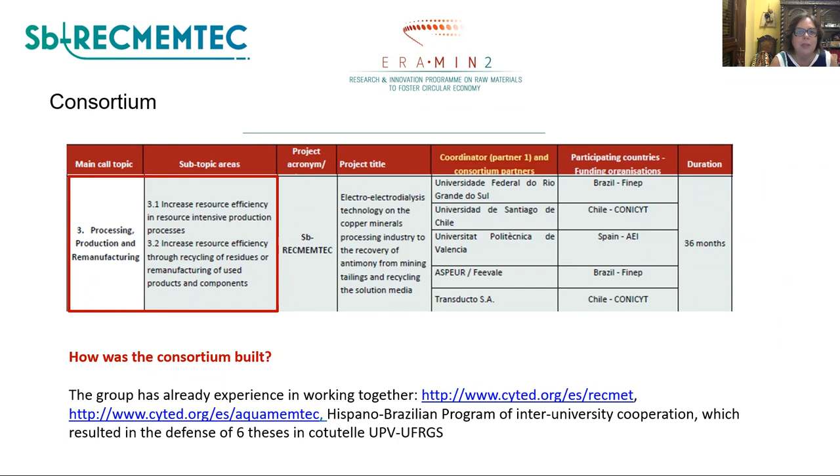So the project is supported by ERAMIN and the funding agencies of each country. And as a function of the different national funding organizations' internal processes, the groups have different project start and end dates and different times and roles.

So especially for Brazil, we began the project in the middle of the lockdown and the pandemic situation. It was a challenge, but we think that we were able to manage it because we always share clear information and objectives between the enterprise and the universities. We have done different online meetings and we are always in touch by WhatsApp and so on.

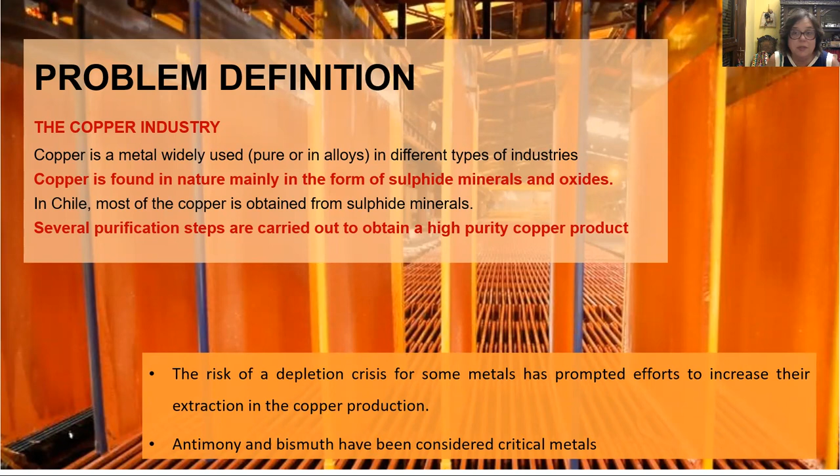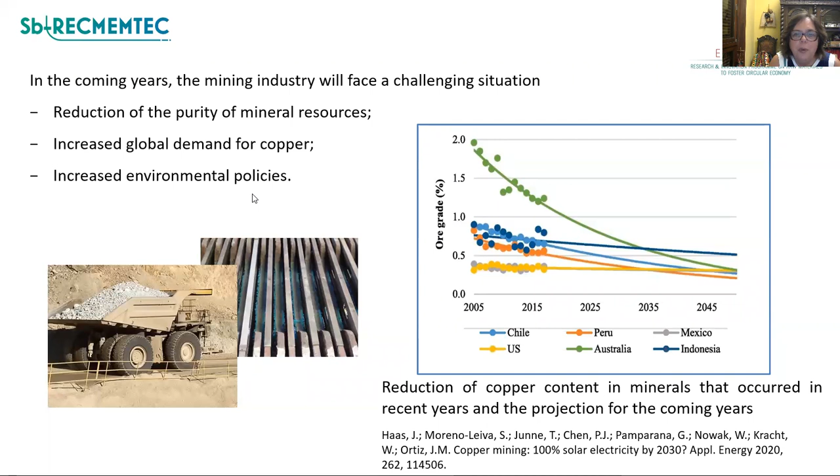In the coming years, the mining industry will face a more challenging situation than today, because of the reduction of the purity of mineral resources, the increased global demand for copper, and increased environmental policies. So it's important to think about the wastes that are being generated and about extracting other metals from the same mineral.

Talking about the state of the art, copper sulfide minerals are processed by pyrometallurgical processes. So there is a mineral processing step, a mineral concentration step, a concentrate casting, and at the end an electro-refining to obtain a copper cathode with 99.99% of purity. This electro-refining is carried out in an electrolysis cell, and sulfuric acid is used as electrolyte.

This sulfuric acid must be purified to be reused. One of the impurities that are removed during this purification step by ion exchange is antimony. And during the ion exchange regeneration with hydrochloric acid, a solution containing antimony, or a wastewater, is generated.

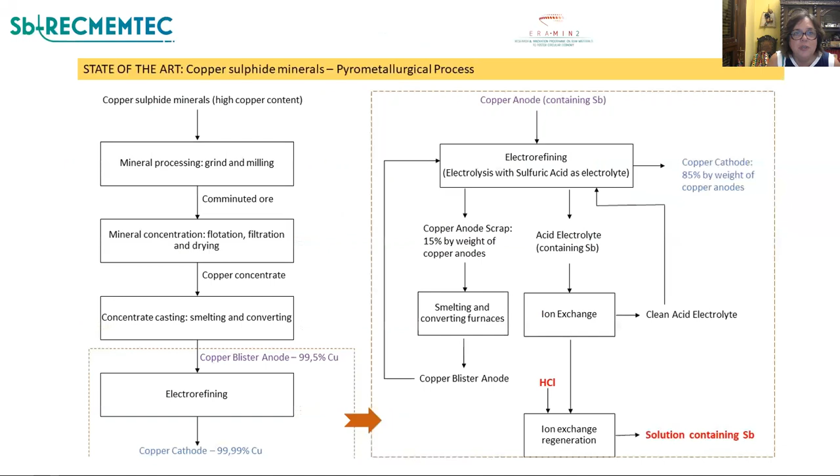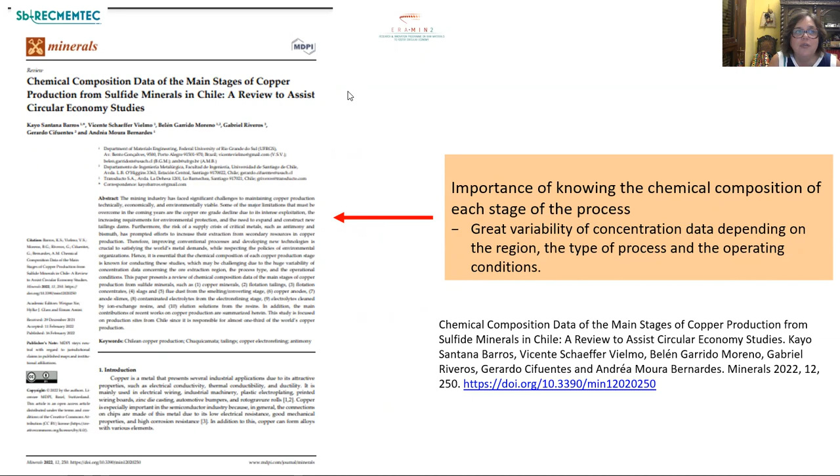Then, one thing that is important is to understand in each of these steps where we can find other metals or antimony to be recovered. So we have done a study about the chemical composition of the main stages of copper production, and the results show that there is antimony in many of the wastes that are generated during the process. But the highest antimony content is in this solution of the ion exchange regeneration.

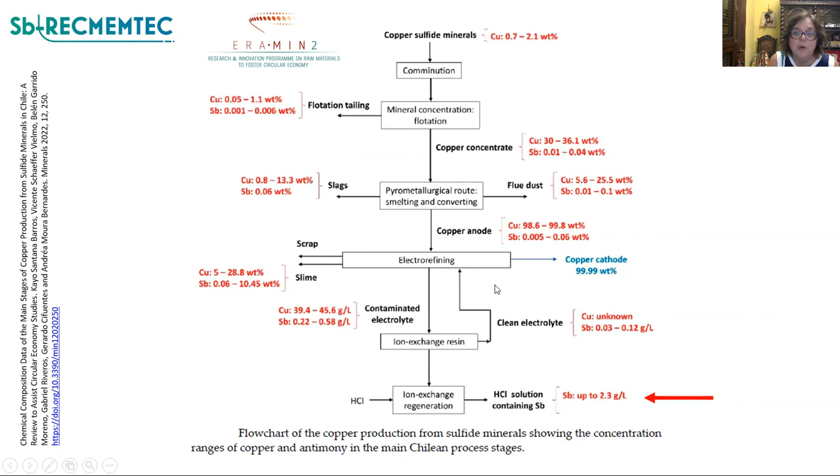So in this project we are studying mainly this solution, but other projects can then be organized to study the recovery of antimony from other wastes.

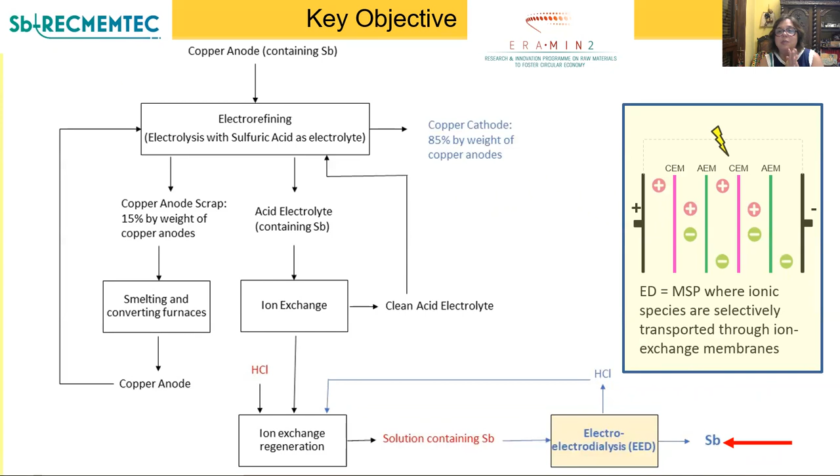So the key objective is the recovery of antimony by electro-electrodialysis. Electrodialysis is a membrane separation process where ionic species are selectively transported through ion exchange membranes. So when we talk about electro-electrodialysis, we are using the same principle, but in this process we are going to recover antimony not only in a concentrated solution, but mainly as a deposit on the cathodes, meaning it is a process used for antimony electrowinning.

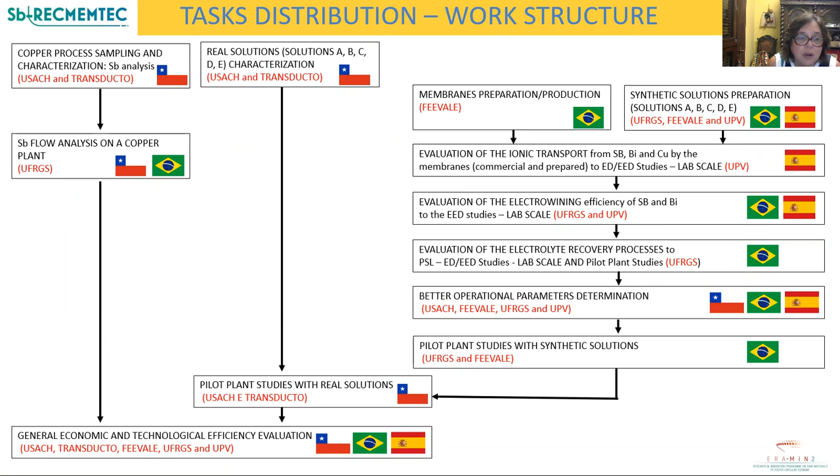About our work structure, we have distributed tasks among the different groups and countries to achieve the main result. That's going to be the definition of operation parameters and a technological and economic efficiency evaluation.

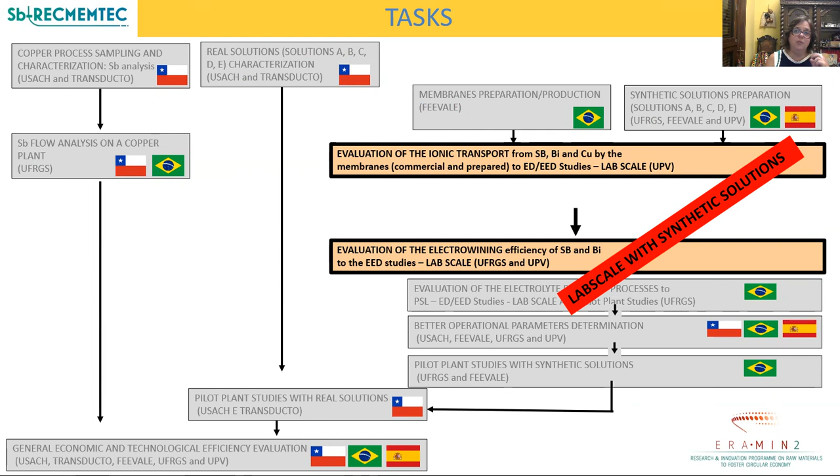I'm going to talk now a little bit about the experiments and results that were done in lab scale with synthetic solutions. These solutions were produced in the laboratory as a surrogate, in terms of hydrochloric acid and antimony, of this wastewater that is generated in the ion exchange regeneration in industry. So Brazil and Spain have worked with this produced solution, and the idea is to recover antimony.

We have to consider that when we have a solution containing hydrochloric acid and antimony, there is the possibility of different chemical reactions forming from anions to cations of antimony. And that is an important parameter when we think about ion exchange membranes. And there is also the possibility of different electrochemical reactions.

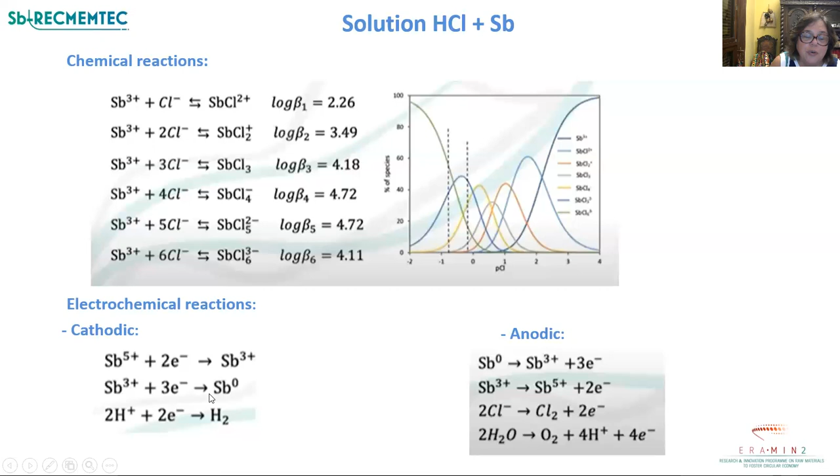The one that is more important for us is this cathodic reaction, where we obtain the antimony as a metal deposit on the cathode. But we should consider that in the anodic part of the cell, there will be the possibility of reoxidation of this produced antimony. So the idea of using a membrane is to separate cathodic and anodic reactions and then to have this reaction occurring and recovering antimony.

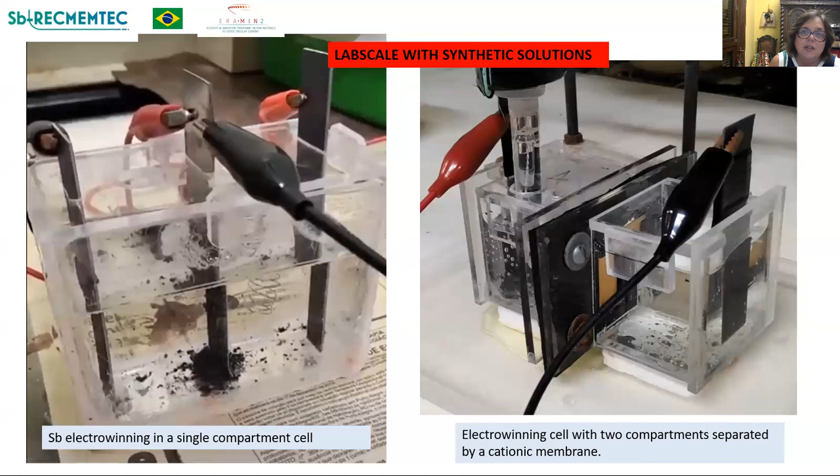So in Brazil we started working with lab scale experiments, and we have done the antimony electrowinning in a single compartment cell, and also electrowinning with two compartments, and the compartments were separated by a cationic membrane. The idea then was to avoid the reoxidation of antimony.

We have obtained different qualities of antimony deposit, but it was possible to recover antimony from the solution. We are also studying the electrodialysis process in order to recover the acid to be reused in the ion exchange regeneration.

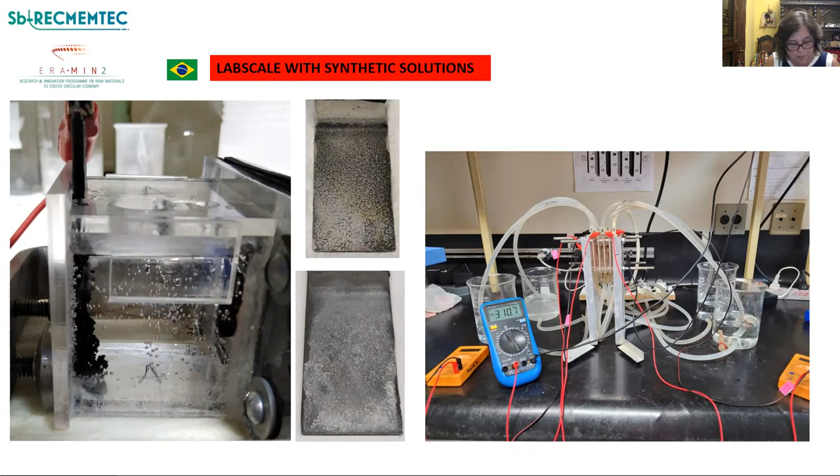When more negative potentials are used, then there is hydrogen production, and this generates a less adherent deposit. So the hydrogen generation generates a deposit that doesn't have the same quality.

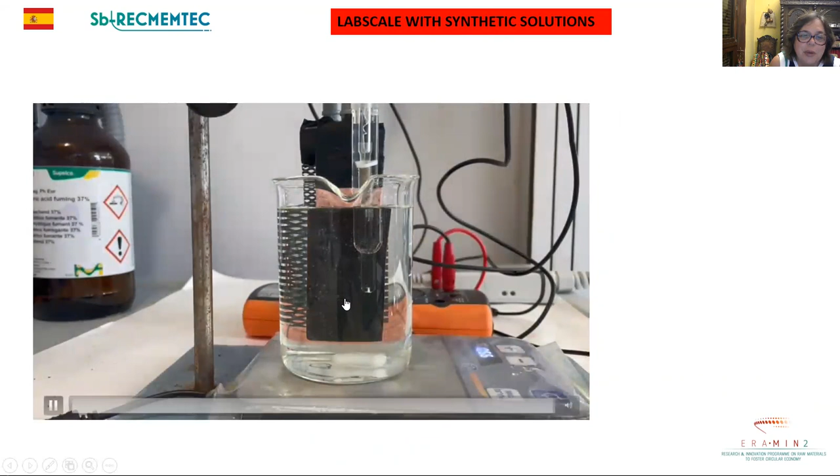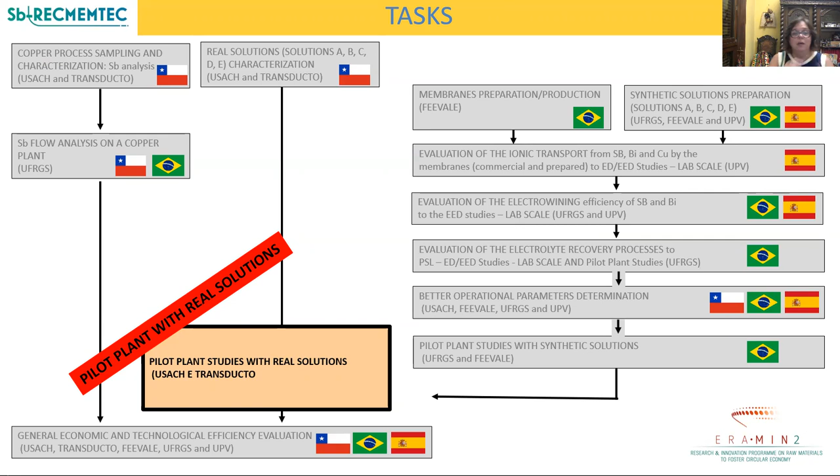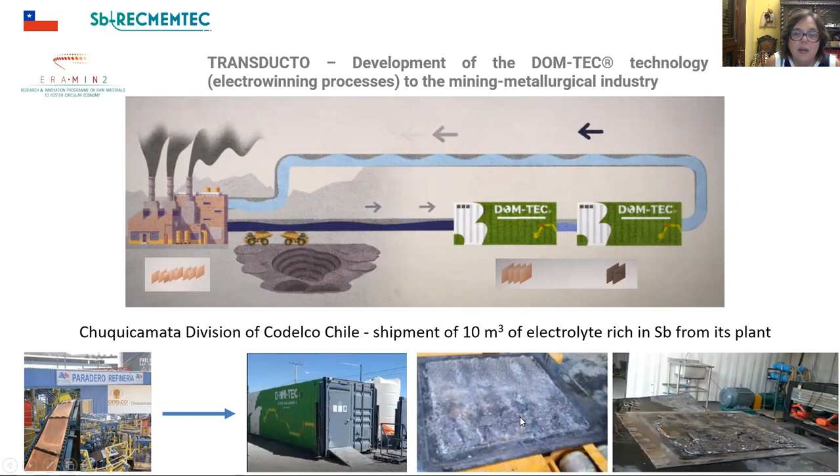So considering that we have a copper production industry, the wastewater generated is going to pass through their process in order to recover water, copper, and in our case, antimony. So to really see if in the case of antimony it was possible, they received 10 cubic meters of electrolyte rich in antimony from the Chuquicamata division plant of Codelco, Chile, treated it, and here are the deposits that they were able to produce.

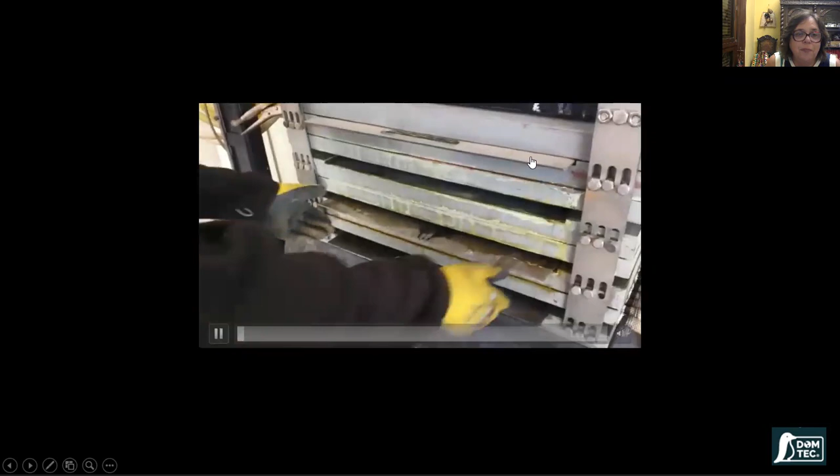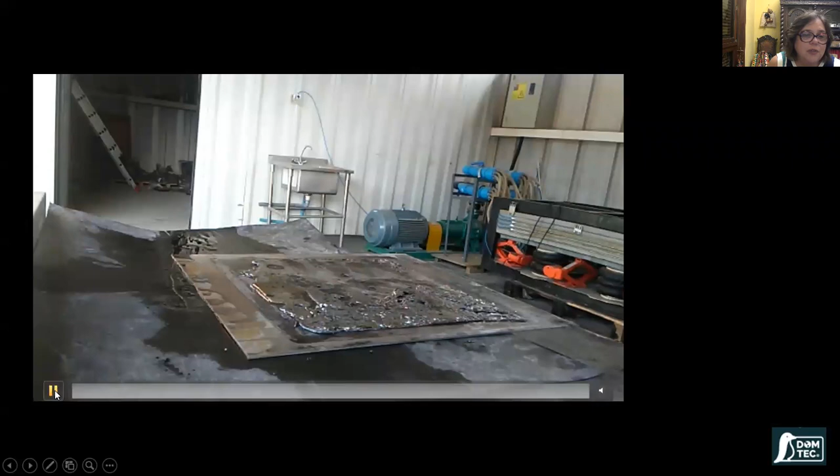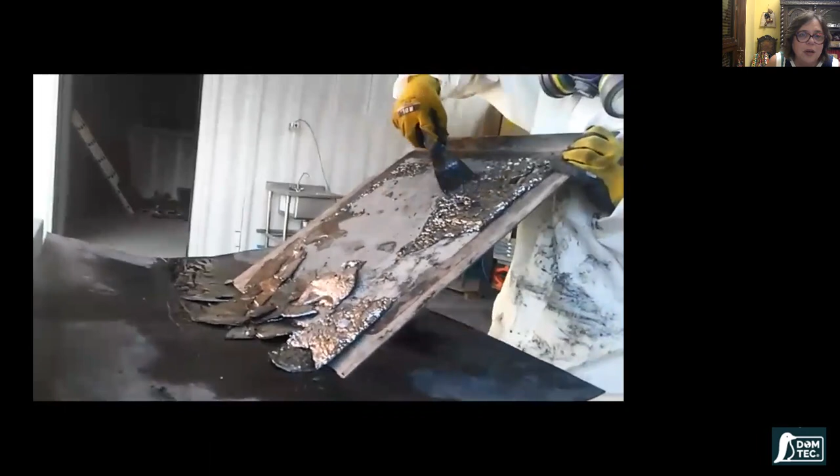So there is also a video here. Their cell has membranes, and it's a horizontal cell where we can see the production of antimony. Here is the electrode, the cathode, with the deposit. So it's also possible to see that it's not difficult to remove this antimony from the cathode. So it's going to be easy to separate the antimony metal from the cathode, in this case it's not copper, in order to recover the metal.

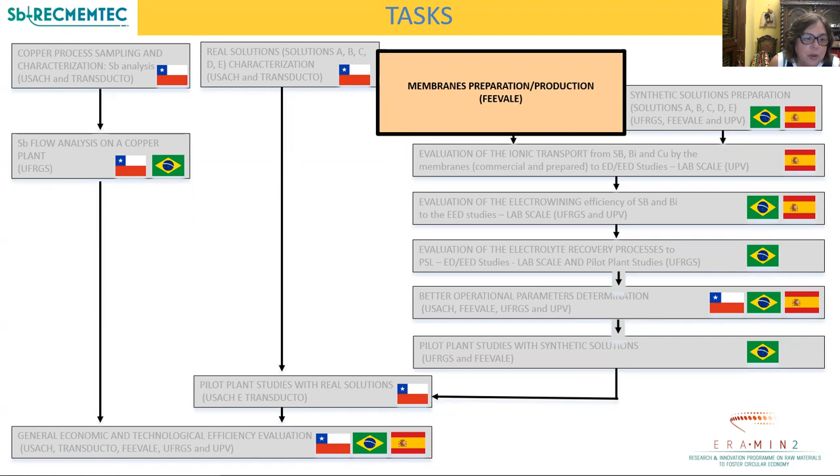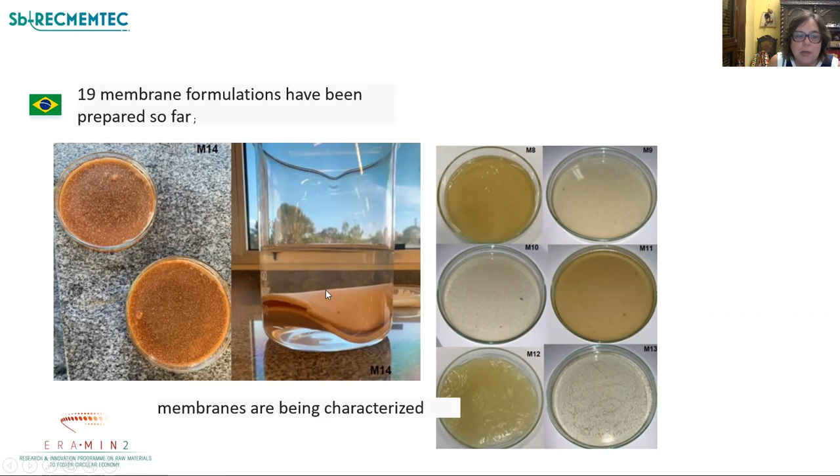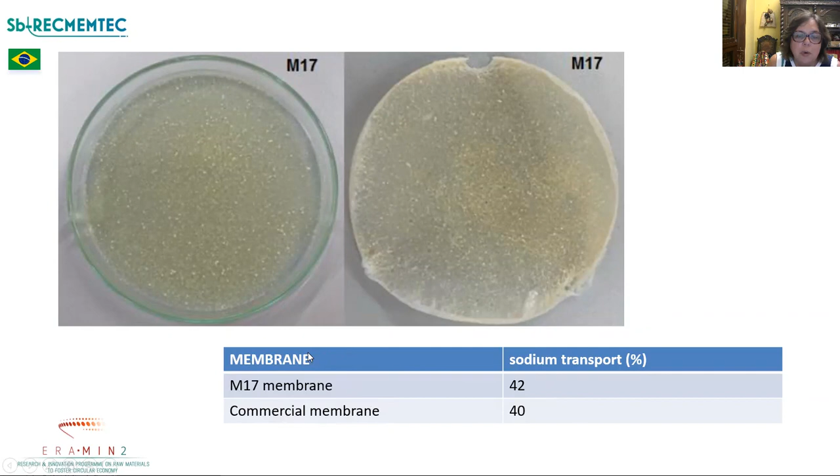Another thing that we are beginning to do is membrane preparation or production. So we have the idea to process all the steps that we have already carried out with the commercial membranes, but with membranes prepared in our groups. We began with different formulations, so 19 membrane formulations have been prepared so far. They are being characterized, and until now the M17 membrane is the best one that we produced because it has similar properties to the commercial membrane.

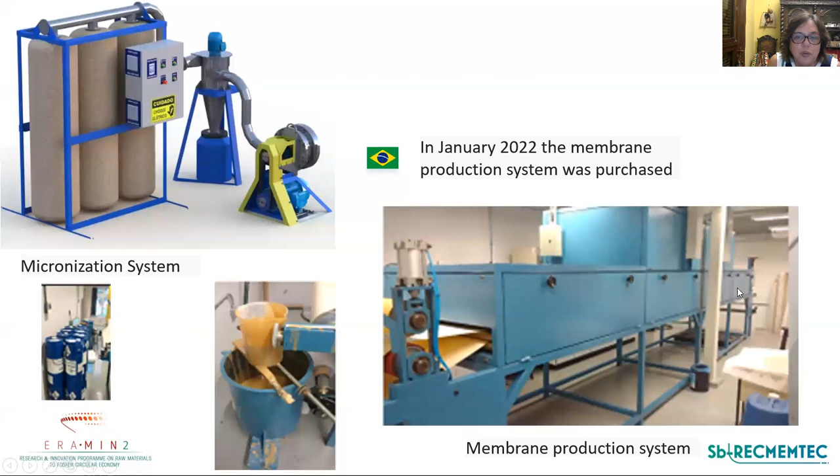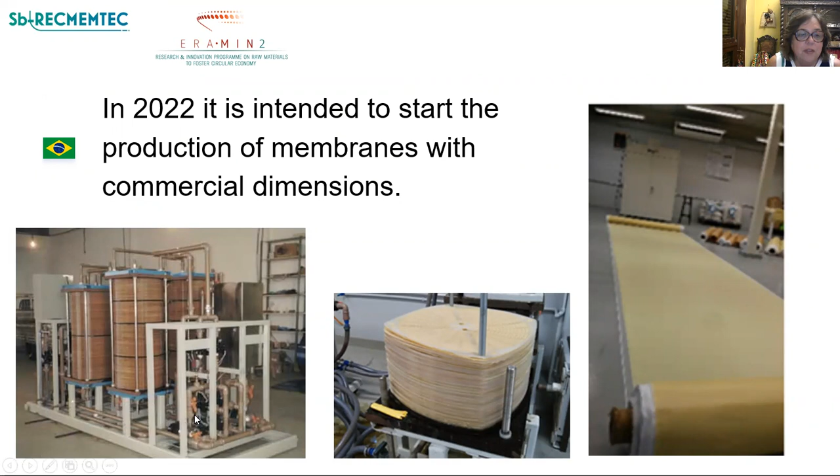In January this year, the membrane production system was purchased to produce bigger membranes, with commercial dimensions. So we intend to produce them to be tested in this pilot plant from the company in Chile. This is our idea. So future tests include this membrane preparation and the determination of operational parameters with membrane, without membrane, with commercial membranes, and with our produced membrane.

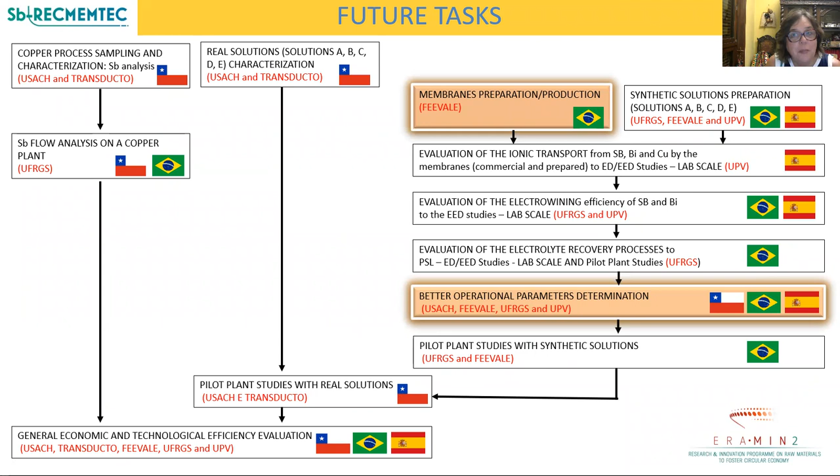And we think that all these results were possible because we have many benefits of this transnational project. First of all, there is the promotion of recycling and circular economy among the different countries that are associated to the project. But especially there is the cooperation, exchange of experience and knowledge between companies and universities, and between universities with different backgrounds, which makes the results much more interesting for everybody.

To discuss these results, we organized in December 2020 an online workshop, organized by the university. And then in October 2021, there was another workshop organized by the Metallurgical Association of Chile. And also in October, another workshop organized by the Brazilian Association of Environmental Engineering. These three workshops are on YouTube, so it's possible to see them and see what we were discussing there.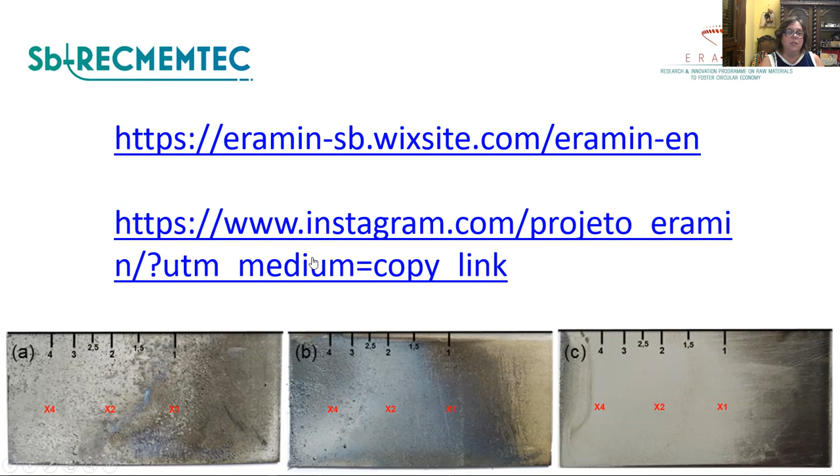Besides the workshops, we have also published 3 different papers in international journals so far, and also one work at the meeting of the International Society of Electrochemistry. All these results are better explained on our webpage, and some results are presented also on Instagram.